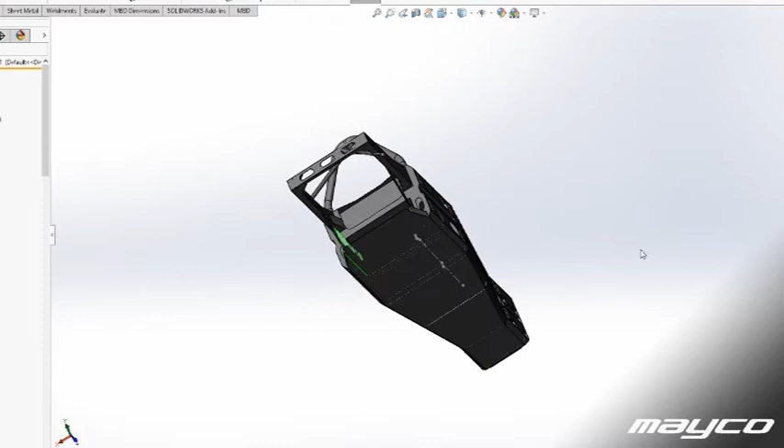Today we are going to be working on the chassis. If you have been following my build, then you know that we finalized most of the packaging and therefore we can now also go into detail engineering of the chassis.

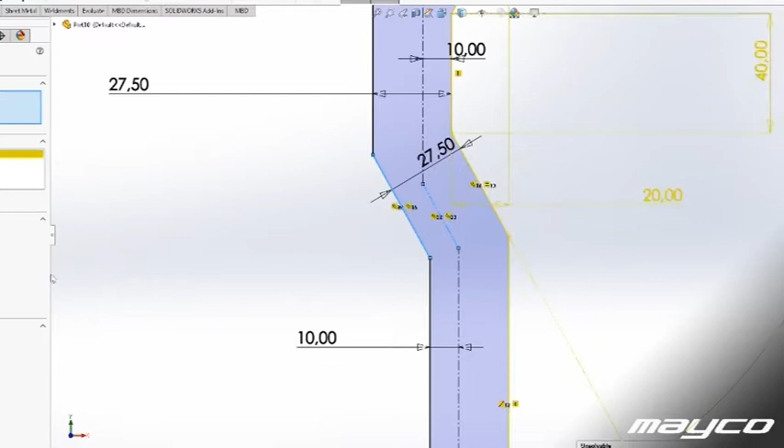In this episode what I will be doing is starting basically the lower section of the chassis and getting all the hard points in for sections of the chassis, and I'm focusing on getting sheet metal to fit very nicely so that it can be welded correctly. And after the entire chassis is done, then we go on to weight saving, but that's not in this episode. Today we will just focus on getting the basic chassis layout done.

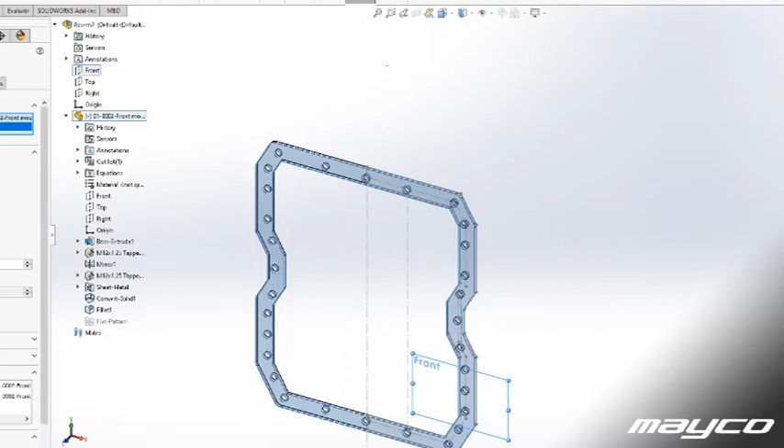During the packaging design, I mentioned that I wanted to change the chassis style a little bit from the FEM model that I made. Reason for that was that I wanted to have a removable nose cone, basically where the suspension and steering is mounted on, so that if you have an impact on your front wheel, for example, it might be that the suspension is damaged, and it might also be that the hard points for the suspension are

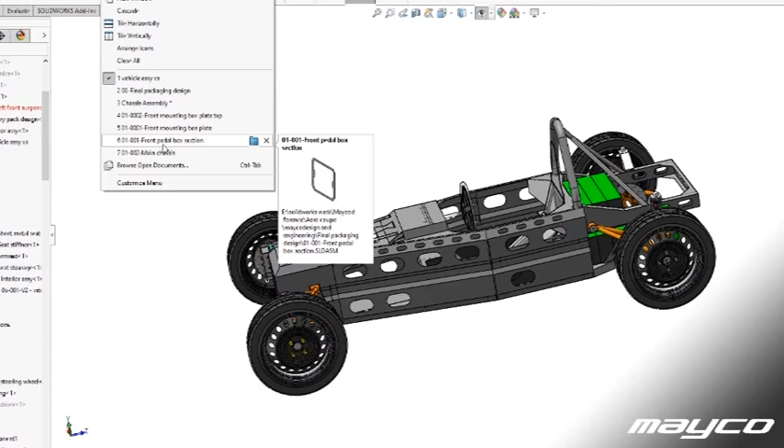damaged, and those are internally welded into the construction to generate longer wishbones, and therefore I wanted to have the nose cone repairable, and therefore we have a mounting flange in the nose cone and on the main chassis.

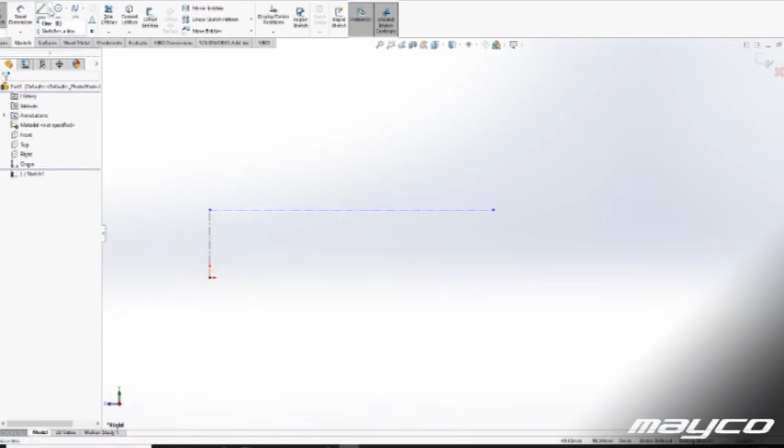And so we start off with making the base plate, 5mm thick base plate, where we can mount the nose cone section on, and that 5mm base plate is the center point for the main chassis and mounting point to the nose cone. When we have that finished, then we can start with the outer sheet metal plate that basically makes the shape of the chassis shell itself.

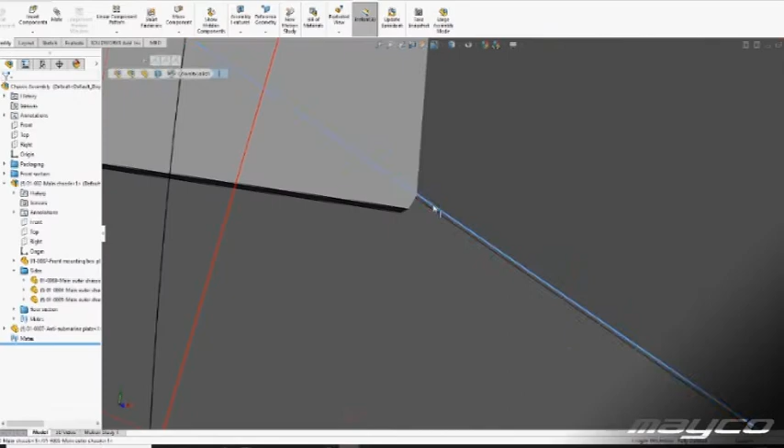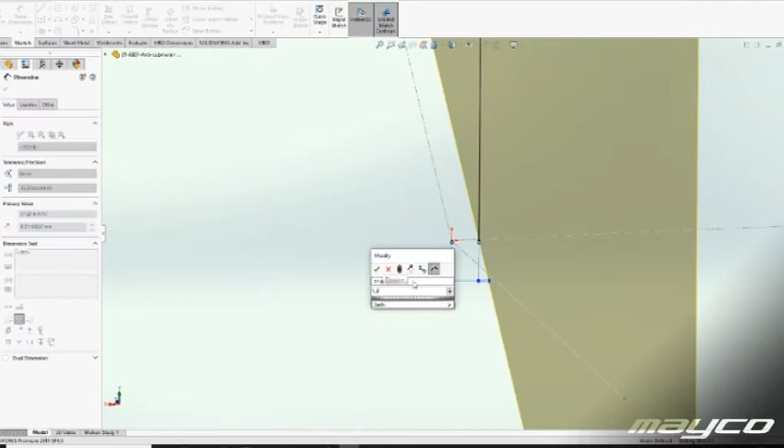The chassis shell itself will be made out of a 1mm thick sheet metal, high strength steel, either Strenx or Domex or something like that, and because of the shape it will generate a lot of stiffness, and by adding proper stiffeners inside that bended profile that we are making, it should generate a very rigid chassis. For the rest, we're gonna try and make as much box sections as possible.

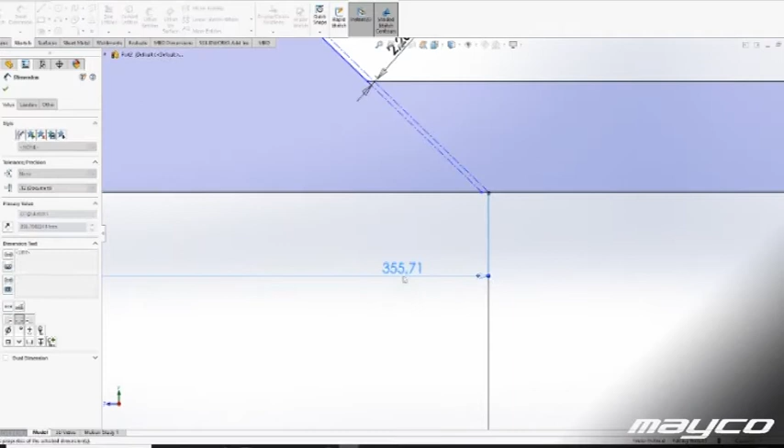For the flooring, we will generate a rail that goes from the thickened plate at the front all the way to the back. That strip is basically there to help guide all the energy from the front impact through the chassis to the back of the chassis and out towards the back, basically around the battery pack. And so that's basically how we envision that part.

So it starts at the front as a raised floor and then continues all the way underneath the driver's seat over the battery pack, and basically in the main structure for the side impact protection.

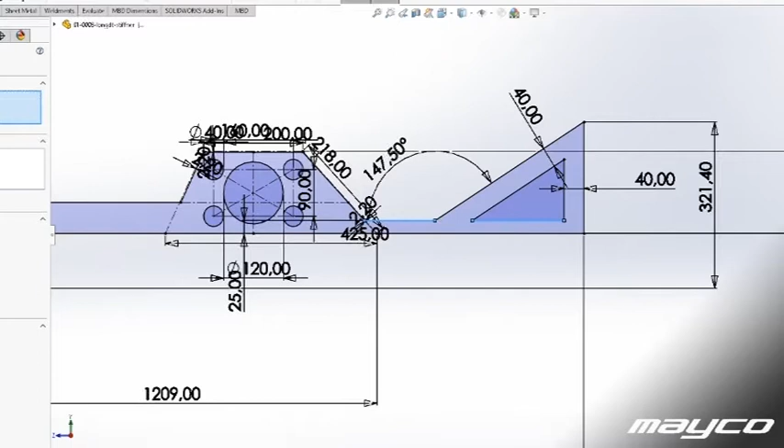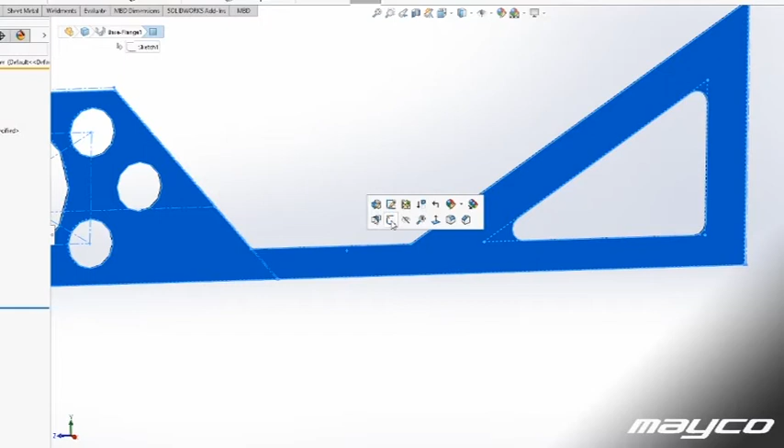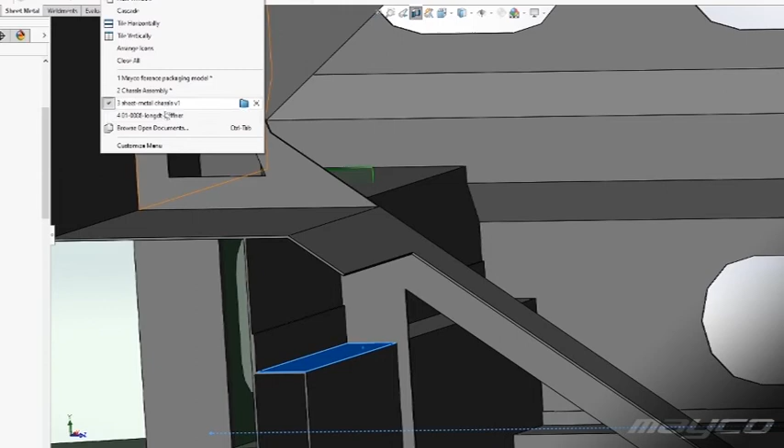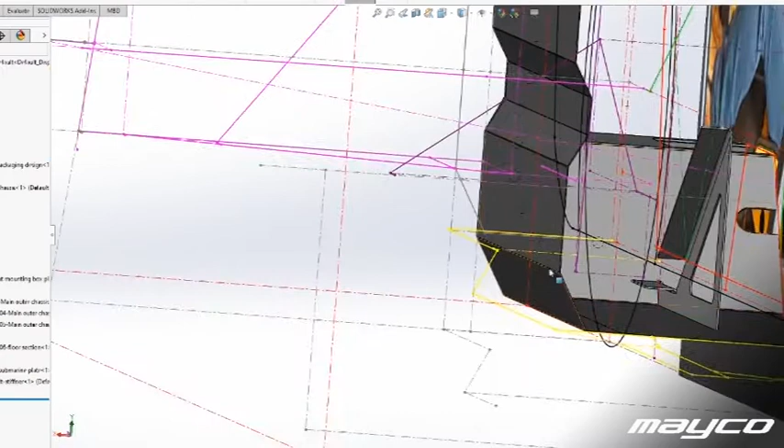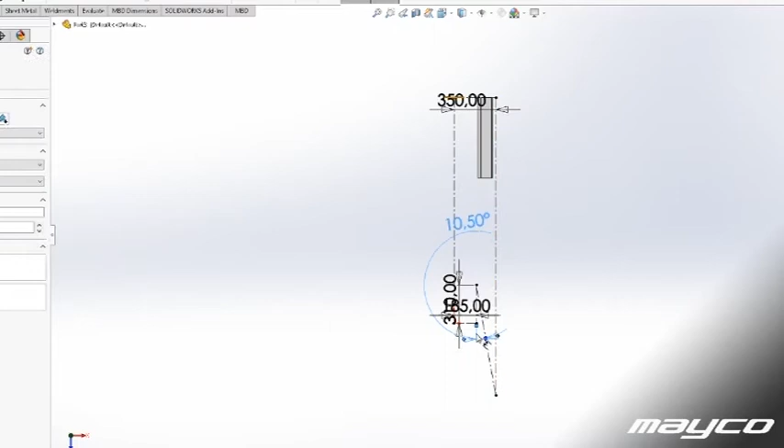Something I saw during the design is that I have these very thick side impact bars around the shoulders and basically at the hips, and currently there's a lot of different structures there, and what I saw is that I can basically make one big box section on the side, from basically the rear of the chassis to where the knees are.

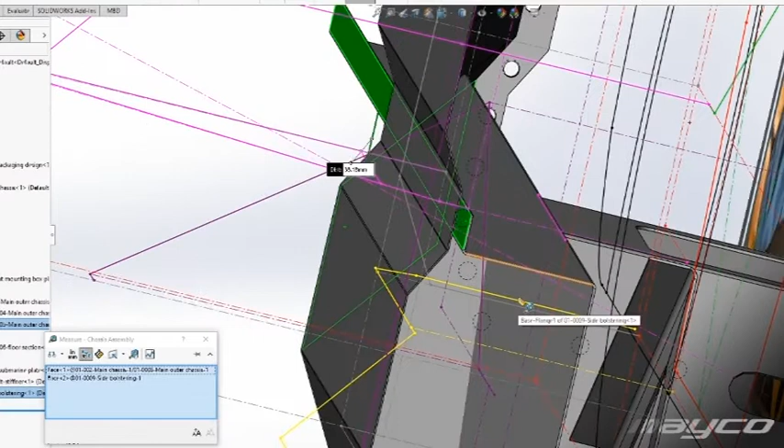Box sections are basically the best way to stiffen up a chassis and to make it rigid. So making these big box sections in the sides basically makes the chassis very stiff and very rigid against bending. And also with the big box sections underneath the knees, basically the anti-submarine plate, that also generates a lot of stiffness. So together with all the additional stiffness that we have, we generated a very stiff structure, and we removed a lot of

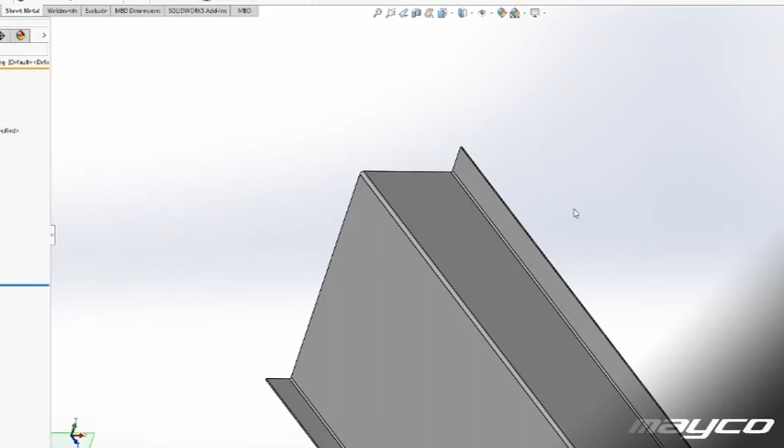separate pieces. So in the old chassis design, I made stiffening rails at the bottom and at the top of the chassis, and they are now completely replaced by other structures that incorporate a much larger surface and generate much more stiffness. And that also means that we have way less parts, and therefore also less costs.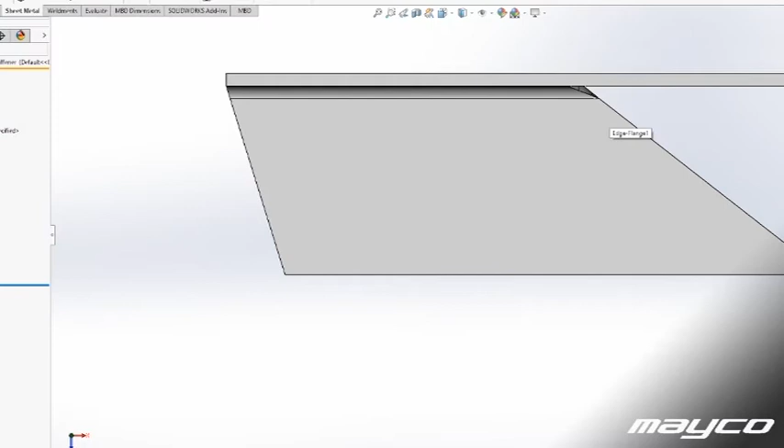Now the back box that I'm making here is basically integrating part of the seat, and it's basically also the firewall to protect the batteries. So that piece has to be completely welded. As you can see from some of the views that I'm showing, there are very nice welding gaps. So most of the chassis could be welded with a TIG. Since I only have MIG, it will most likely be welded with MIG.

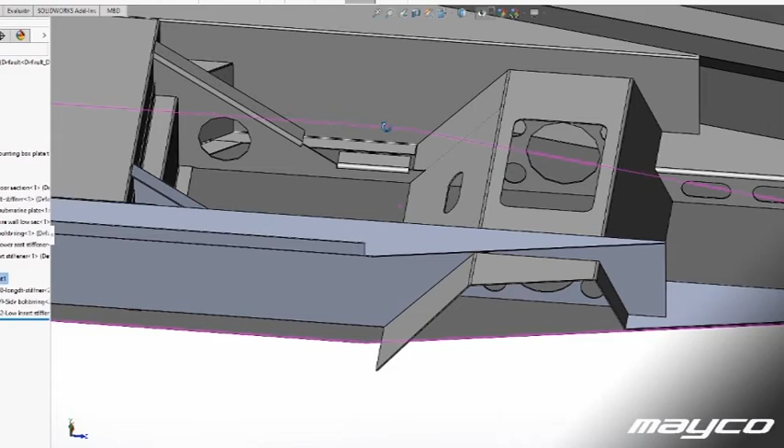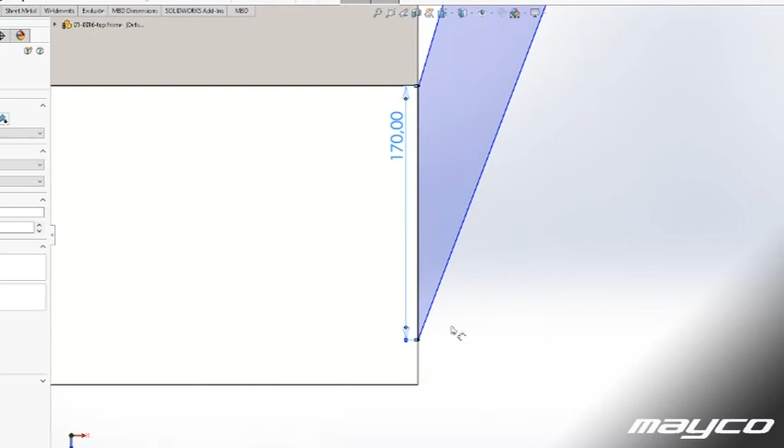A point that I always found a little bit difficult is how to make the top of the chassis with basically the dashboard frame. First of all, it needs to be a very strong and rigid part of the chassis so that forces of the side impact can be transferred over from the left side to the right side, for example. And now when I was working on the model, it also became obvious that the knees need a little bit of room. So a very simplistic bulge is now made, and with that bulge we have some space for the knees, but also space for a dashboard cluster.

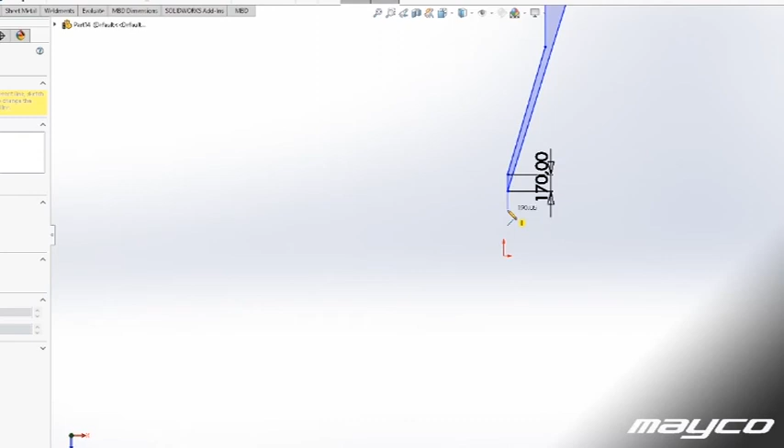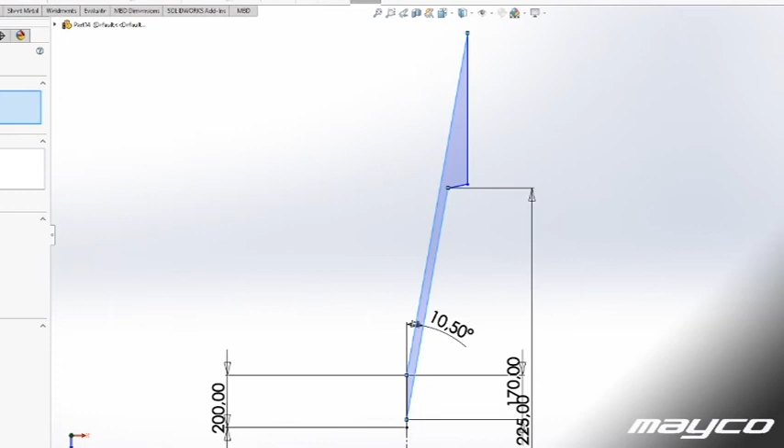And a secondary piece of the dashboard cluster is angled and mounted in between the top of the chassis and the dashboard, generating a stiff profile underneath the dashboard going from the left side to the right side. And from the gauge cluster I need to go around the hands and the steering wheel to the sides to help get the forces from a side impact to go through the dashboard, through the gauge cluster, over to the opposite side. And yeah, developing this section allowed me to accidentally on purpose design this.

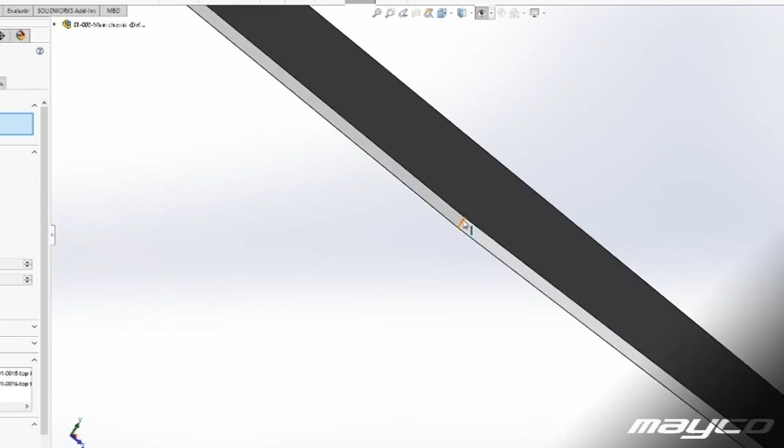Furthermore, I added the steering column, and as you can see I made a slotted hole for the steering column. That means that we can raise and lower the steering wheel somewhat. Currently I have the steering wheel position at the highest point, maybe it needs to go a little bit lower, and I need to have sufficient space for a snap-off steering wheel. What that means is that the steering wheel itself will be removable. As you can see from the small space within the vehicle, we need a structure like that, otherwise we are not able to get into the vehicle or get out of it. So the steering wheel needs to be removable.

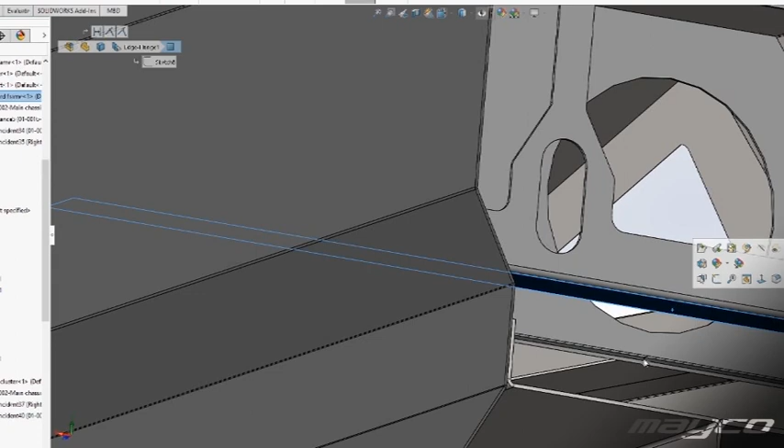So I hope that you like this video. As you can see, in this video we started detailing most of the lower section of the chassis. In the next episode we will continue on with that and also start integrating more and more interior pieces, and hopefully by the end of that episode we will have a good representation of what the chassis needs to look like. I hope that we can also do some weight saving in that episode and see if we can hit the 60 kilograms mark for the entire nose cone and main chassis part with the roll hoop included.